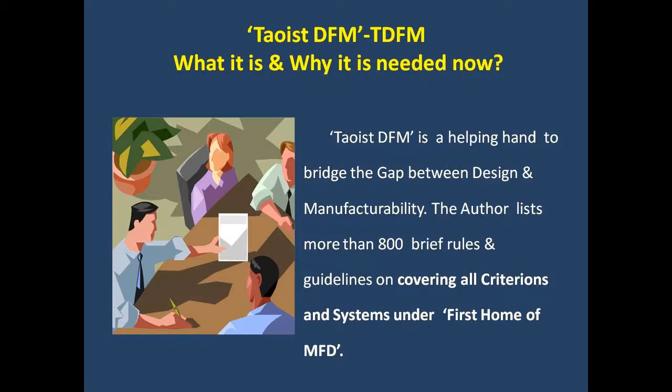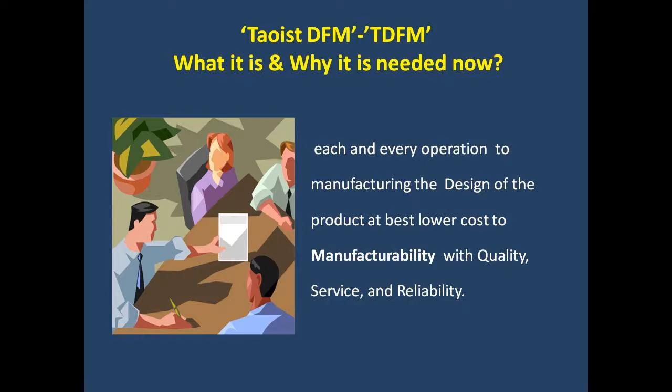Each and every operation to manufacturing design the product at best, lower cost to manufacturability with quality, service, and reliability. By following the rules and guidelines, CAD engineers can climb up the ladder to become an ideal practical designer.

80% of the cost is determined while releasing the drawing from PD. By the time the product goes to production, 95% of its cost is determined. So it will be very difficult to remove cost at a later stage.

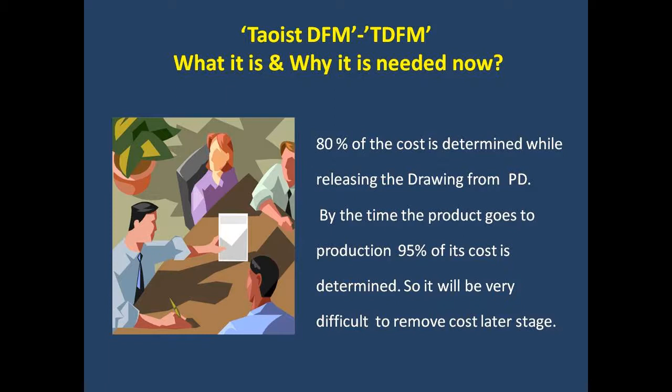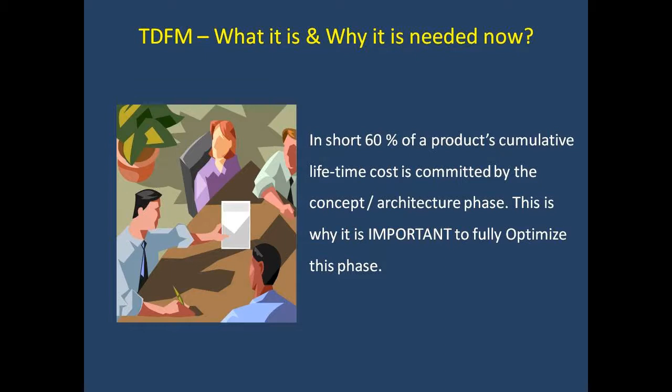In short, 60% of a product's cumulative lifetime cost is committed by the concept architecture phase. This is why it is important to fully optimize this phase. And in practice, most of our engineering products or equipment are only re-engineering or reverse engineering of approved products. Only a small percentage are 100% new and original thoughts.

More on the book of Taoist Design for Manufacturability: 8 criterions and 8 systems built on the basic foundations provided by Dr. Anderson on DFM, our mentor.

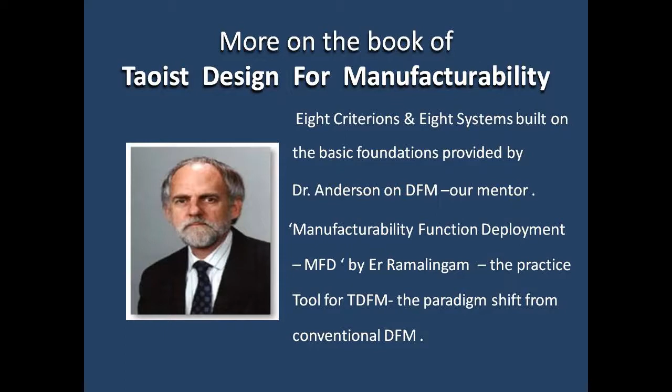Manufacturability Function Deployment, MFD, by Er Ramalingam, the practice tool for Taoist DFM, the paradigm shift from conventional DFM. Concurrent engineering team with participation of domain experts from Yang and Yin.

Developing the perfect operation process sheet cum quality plan by merging process division with design division. QMS head as the group captain under Tao of DFM, with additional captains from design and manufacturing. World's most simplified DFM methodology, developed with MS Excel.

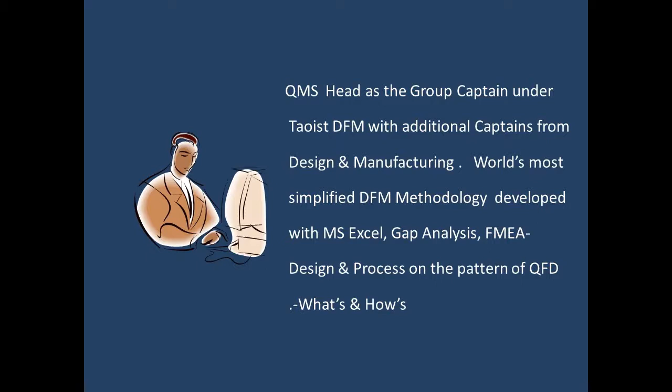Gap analysis, FMEA, design and process on the pattern of quality function deployment, whats and hows. Welcome manufacturing engineers with passion for design and design engineers with passion for manufacturing, for skill development of experienced engineers, faculties from industries, institutions from any domain who can blend both bricks and clicks.

Taoist Design for Manufacturability: origin of DFM. The conventional design approach was to include manual assembly so that manufacturing engineers could make justifications for automation proposals.

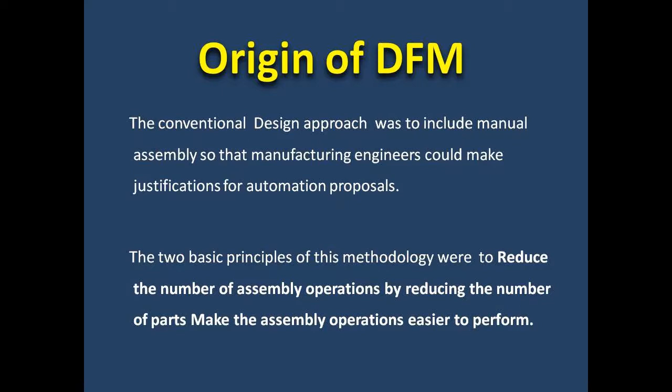The two basic principles of this methodology were to reduce the number of assembly operations by reducing the number of parts, and to make the assembly operations easier to perform. These principles stood in stark contrast to the dominant producibility guidelines of the time.

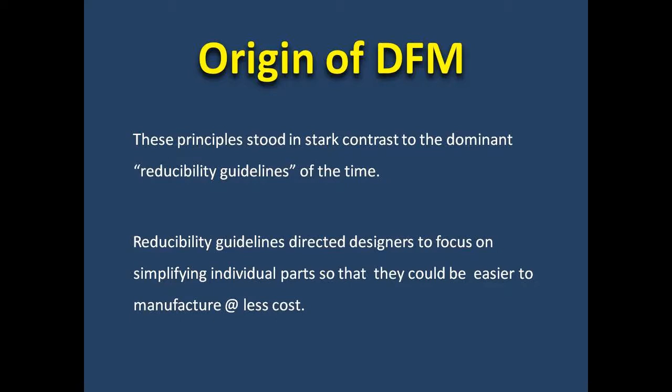Reducibility guidelines directed designers to focus on simplifying individual parts so that they could be easier to manufacture at less cost. Dr. Boothroyd's groundbreaking research exposed the fact that this practice actually led to substantially higher product costs relative to the use of fewer, multifunctional parts.

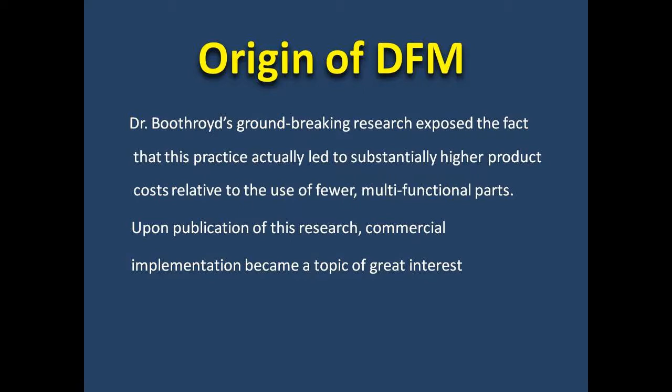Upon publication of this research, commercial implementation became a topic of great interest. In 1980, Dr. Peter Dewhurst joined with Dr. Boothroyd to create the software package Design for Automatic and Manual Assembly, DFA, for the Apple II Plus.

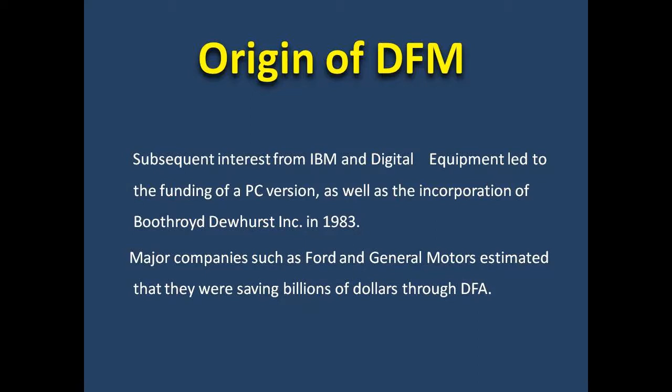Subsequent interest from IBM and Digital Equipment led to the funding of a PC version, as well as the incorporation of Boothroyd Dewhurst Inc. in 1983. Major companies such as Ford and General Motors estimated that they were saving billions of dollars through DFA.

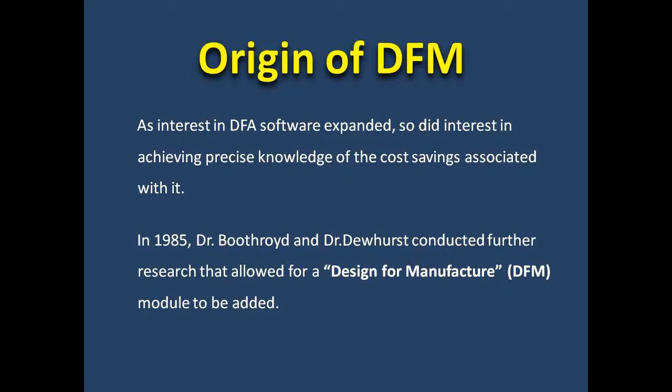As interest in DFA software expanded, so did interest in achieving precise knowledge of the cost savings associated with it. In 1985, Dr. Boothroyd and Dr. Dewhurst conducted further research that allowed for a Design for Manufacture, DFM, module to be added.

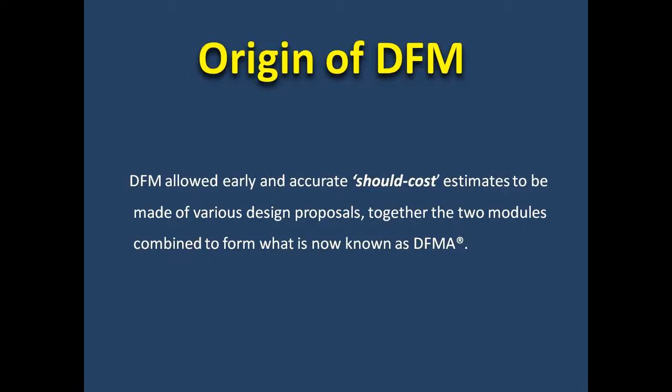DFM allowed early and accurate should-cost estimates to be made of various design proposals. Together, the two modules combined to form what is now known as DFMA.

The enormous benefits that DFMA provided to leading manufacturers led President George H.W. Bush to award the founders of BDI the National Medal of Technology in 1991.

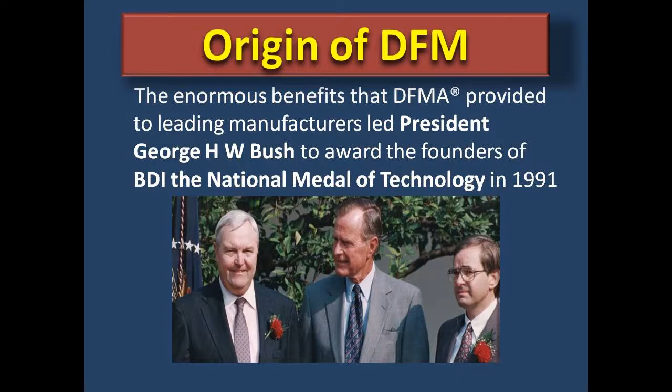They have proved that better designed products need no automation to increase productivity. Design for Manufacturability and Concurrent Engineering, by Dr. David M. Anderson, 2004.

After a short-term training on Dr. Anderson, being an electrical engineer cum professor, was able to implement DFM with his earlier employer Intel to bring fantastic productivity in-house with his own tool room supports.

Then Dr. Anderson started sharing outside also, and shared with the world through his master book titled Design for Manufacturability and Concurrent Engineering, during 2004.

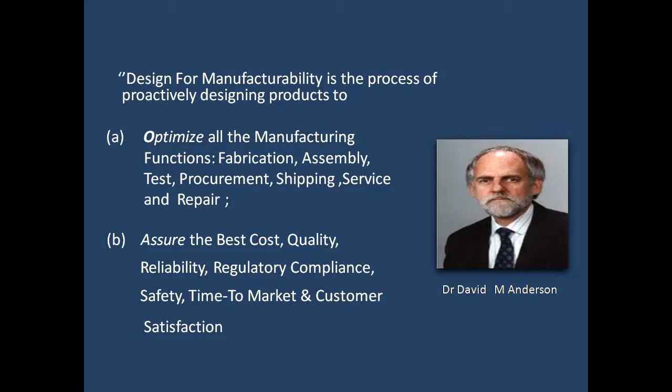Design for manufacturability is the process of proactively designing products to, A, optimize all the manufacturing functions: fabrication, assembly, test, procurement, shipping, service and repair; and B, assure the best cost, quality, reliability, regulatory compliance, safety, time to market, and customer satisfaction.

Ensure that lack of manufacturability doesn't compromise functionality, styling, new product introductions, product delivery, improvement programs, strategic initiatives and unexpected surge in product demand, as per Dr. David M. Anderson, our mentor for DFM.

Concurrent engineering is the process of designing products in multifunctional teams with all specialities working together from all the stages.

Dr. Anderson has certified this author as India's DFM expert during 2011. He sent a copy of his 2011 edition duly signed by him for my study on his DFM, a rare honor of introduction for this author in India.

Through this popular DFM book and direct interactions with the undersigned in an attempt to bring about a DFM movement during 2011, this author came out with his maiden book titled Taoist Directions for Design and Development, synergizing his own thoughts on Taoism with DFM during 2014.

Taoism is presented by Dr. Fritjof Capra in his book The Tao of Physics, 1975. This author has been fascinated by the out-of-box thinking of finding parallels between modern physics and Eastern mysticism of Taoism, as displayed in the widely sold book by Dr. Fritjof Capra titled The Tao of Physics.

Like Dr. Fritjof Capra, author Mr. K.S. Ramalingam, in an out-of-box thinking, found parallels between design for manufacturability and Eastern mysticism of Taoism, as displayed through Yang and Yin.

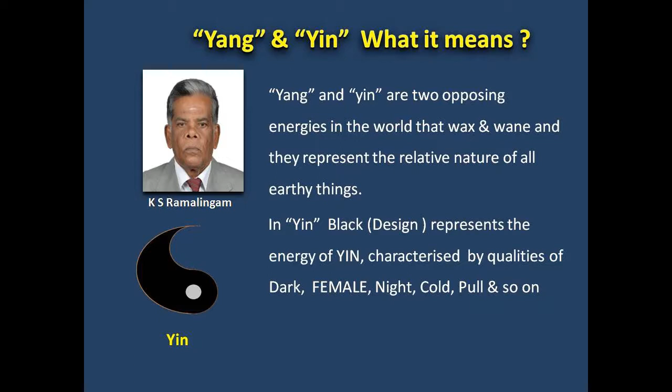In Yin, black design represents the energy of Yin, characterized by qualities of dark, female, night, cold, pull and so on. In Yang, white design represents the energy of Yang, characterized by qualities of white, male, day, hot, push and so on.

Within the Yin, lies the seed of Yang, as represented by the white dot. Within the Yang, lies the seed of Yin, as represented by the black dot.

Within the Yin manufacturability, lies the seed of Yang design, as represented by the white dot. Within the Yang design, lies the seed of Yin manufacturability, as represented by the black dot.

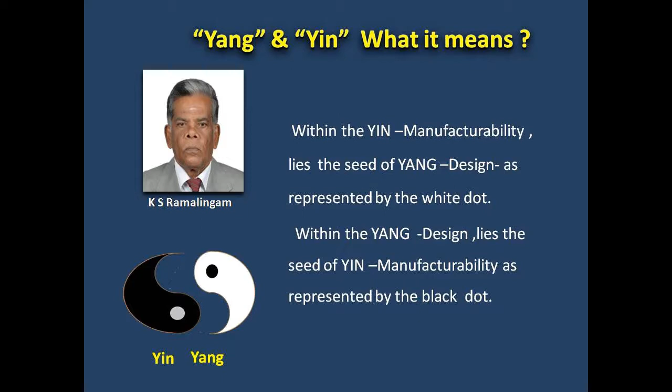At the interface between Yin and Yang, manufacturability and design, lies the creative potential of getting products with reliable design and rapidly developed with responsive DFM.

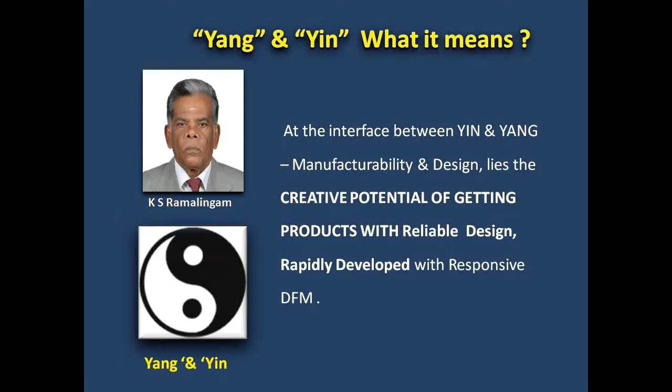Taoism and Dr. Fritjof Capra: The Taoists saw all changes in nature as manifestations of the dynamic interplay between polar opposites Yin and Yang, and thus they came to believe that any pair of opposites constitutes a polar relationship where each of the two poles is dynamically linked to each other.

This author, Mr. K.S. Ramalingam, saw all changes in engineering products as manifestations of the dynamic interplay between polar opposites design and manufacturability, and came to believe that any pair of opposites constitutes a polar relationship where each of the two poles is dynamically linked to each other.

You can find in the author's first DFM handbook the comments offered by Dr. Anderson as follows: more than thousands of rules, guidelines. That should be good for your book and your practice.

These rules and guidelines form the core of MFD, manufacturability function deployment, by this author himself.

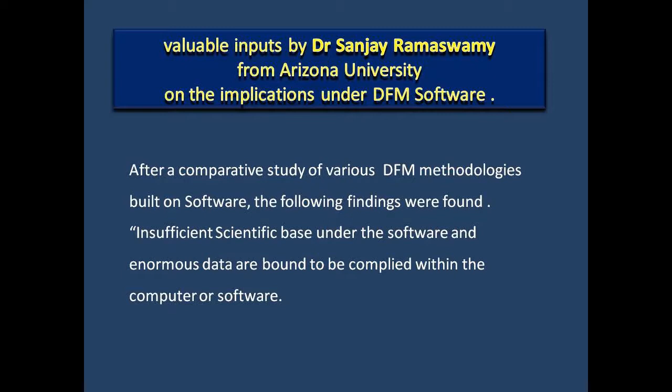Valuable inputs by Dr. Sanjay Ramaswamy from Arizona University on the implications under DFM software. After a comparative study of various DFM methodologies built on software, there is an insufficient scientific base under the software, and enormous data are bound to be compiled within the computer or software.

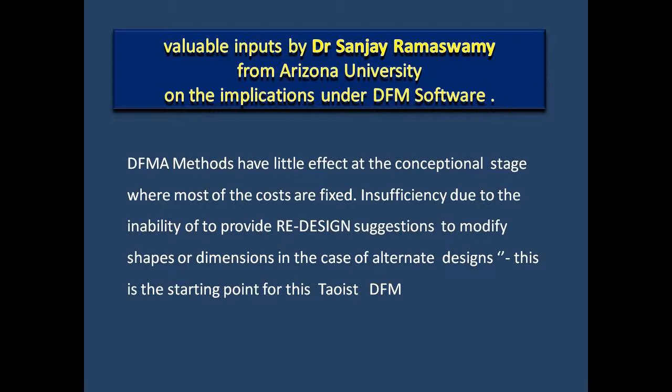DFMA methods have little effect at the conceptual stage, where most of the costs are fixed. There is an insufficiency due to the inability to provide redesign suggestions to modify shapes or dimensions in the case of alternate designs. This is the starting point for my Taoist DFM.

Definition of Taoist DFM (TDFM): 64 spokes join in one hub. Taoist DFM's outcome is manufacturable products, or manufacturability, the Yin. The hardware is all visible to the naked eyes.

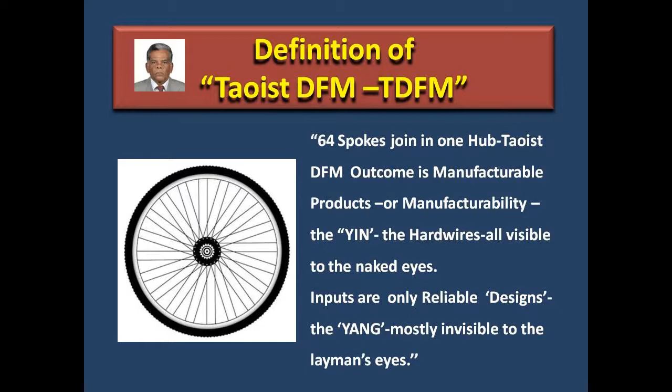Inputs are only reliable designs, the Yang, mostly invisible to the layman's eyes. It is the invisible, or design, DFM, which creates the function of the manufactured products which are visible. All designs are invisible; only everything is now open to the world through Taoist DFM, TDFM.

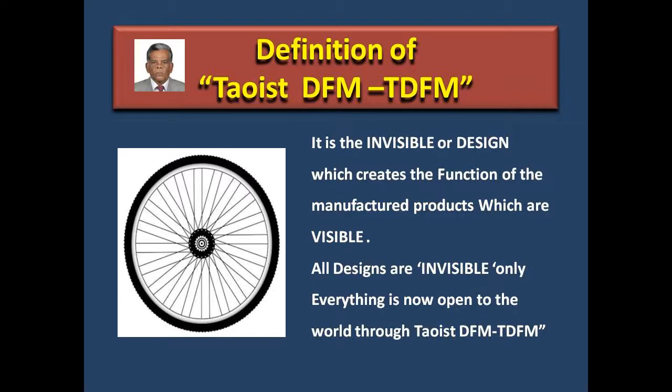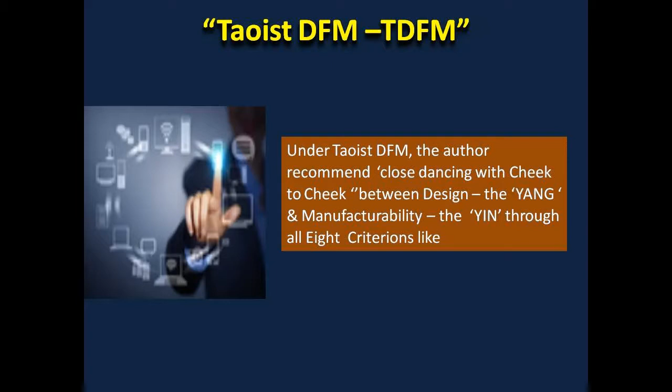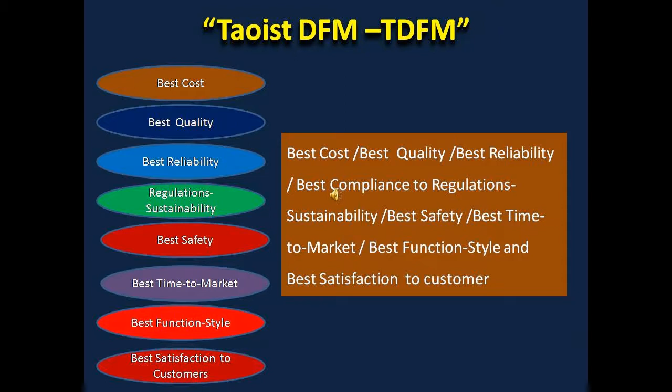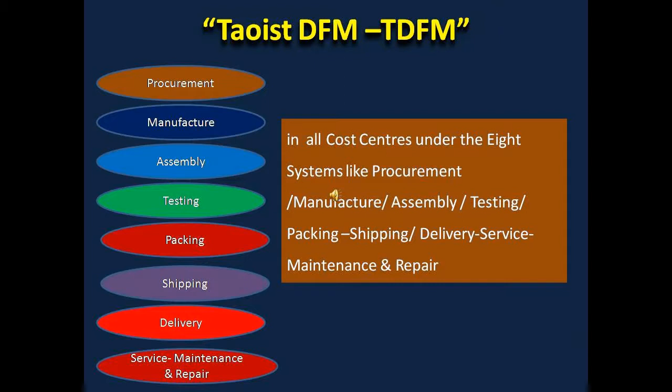Under Taoist DFM, the author recommends close dancing, cheek to cheek, between design, the Yang, and manufacturability, the Yin, through all 8 criterions like best cost, best quality, best reliability, best compliance to regulation and sustainability, best safety, best time to market, best function and style, and best satisfaction to customers, across all cost centers under the 8 systems like procurement, manufacture, assembly, testing, packing, shipping, delivery, service, maintenance and repair.

Differences between conventional DFM and Taoist DFM.

Under Taoist DFM, design for manufacturability is moved from a design function to a regulatory function to overcome some of the constraints of conventional DFM, facilitating improvements in DFM analytics. It overcomes the resistance of the design team itself by awarding a different role, taking up the role of a champion, not as fully responsible for design without affecting the ego of the design team.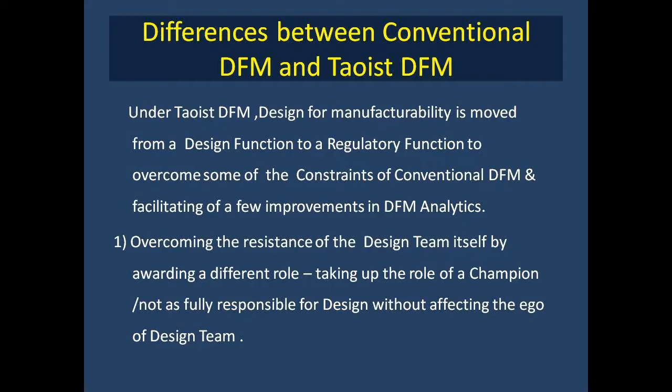The merger of process team with design team removed the gap between design and process. The reinforced design team is given total responsibility for design and process, and the process is in full alignment with design or vice versa, a 50% score in manufacturability indeed.

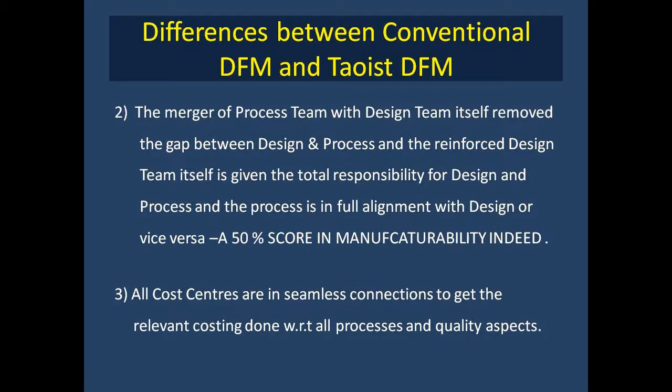All cost centers are in seamless connection to get the relevant costing done with reference to all processes and quality aspects. Since the group captain from QMS quality is assigned the leadership role, management is assured of total support from QMS, design, and manufacturing for all business processes.

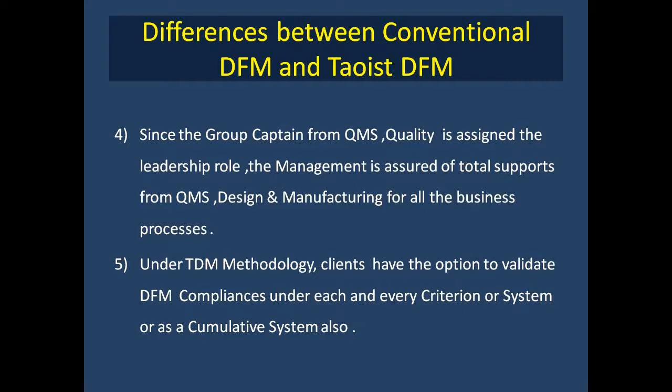Under TDM methodology, clients have the option to validate DFM compliances under each and every criterion or system, or as a cumulative system also. Clients have the liberty to do redesign at any stage, or part, or sub-assembly also.

As the MR is the group captain under TDFM, the whole team is committed and it becomes a joint responsibility of captains from quality, manufacturing, and design, as they are also jointly committed.

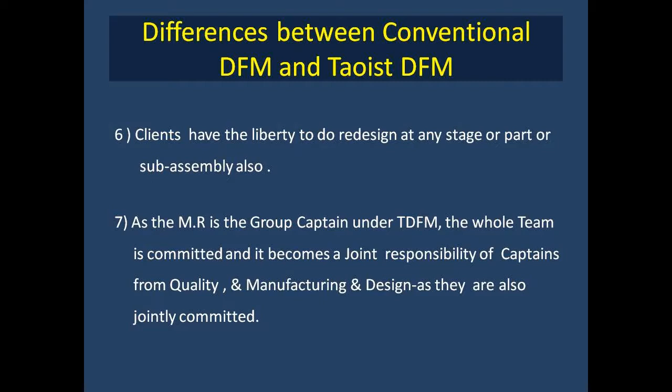Under engineering products and equipment, most of the new products are either in re-engineered design or a reverse engineered design out of the older approved one.

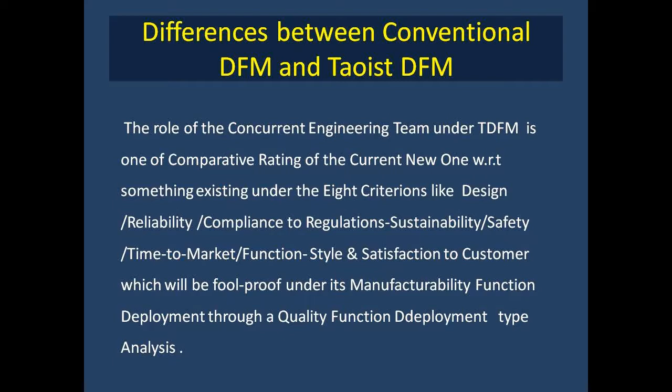The role of the concurrent engineering team under TDFM is one of comparative rating of the current new one with respect to something existing, under the 8 criteria like design, reliability, compliance to regulations, sustainability, safety, time to market, function, style, and satisfaction to customer, which will be foolproof under its manufacturability function deployment through a quality function deployment, QFD type analysis.

The Yang and Yin of Taoist DFM. A separate presentation is available on CET with Yang and Yin, prologue to Taoist DFM.

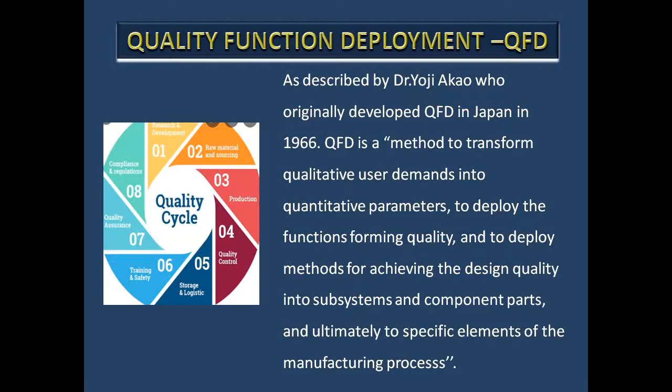Quality Function Deployment, QFD, as described by Dr. Yoji Akao, who originally developed QFD in Japan in 1966. QFD is a method to transform qualitative user demands into quantitative parameters, to deploy the functions forming quality, and to deploy methods for achieving design quality into subsystems and component parts, and ultimately to specific elements of the manufacturing process. The author combined his work in quality assurance and quality control points with function deployment used in value engineering.

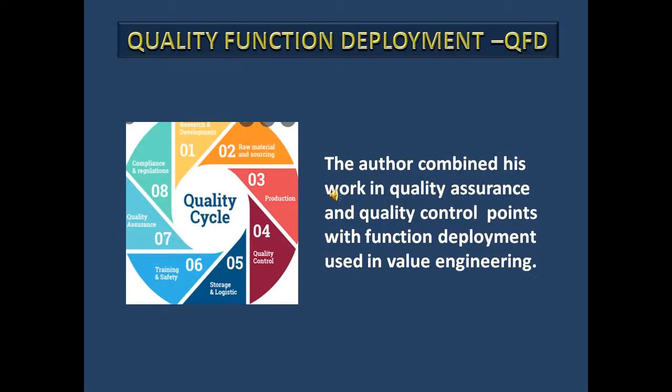Manufacturability function deployment is a method to transform DFM recommendations of the concurrent engineering team, with a blend of yang and yin, into quantitative parameters, to deploy the manufacturability functions into design of subsystems and component parts, and ultimately to specific elements of the process of manufacturing, as per Tao of DFM.

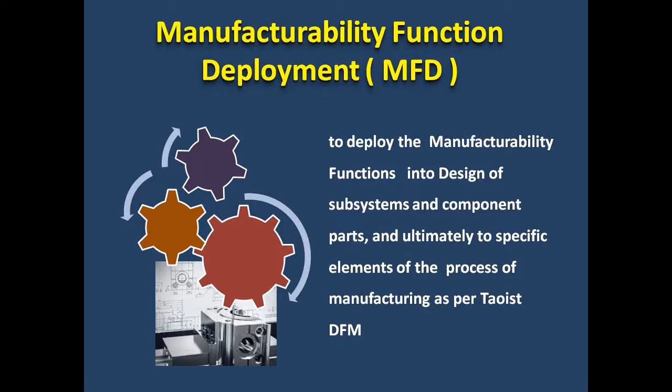Developing the perfect operation process sheet cum quality plan. Merging process planning division with the design division is mandatory under Tao of DFM. It ensures avoiding bugs in design through synchronization.

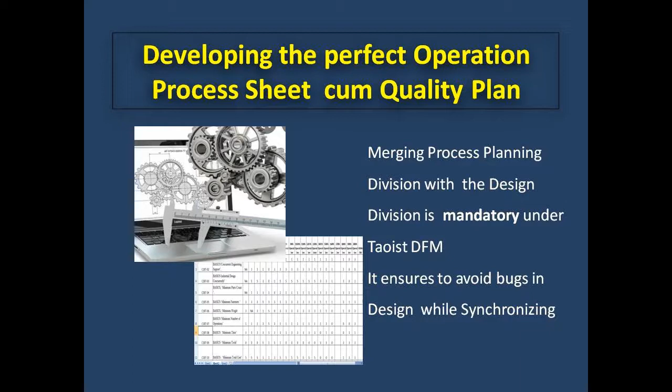While evolving the process cum quality plan, the process engineering team has to adopt various rules and guidelines as per TDFM for all the processes in each cost center, which is again cross-checked by the CET for all processes, either system-wise or criterion-wise.

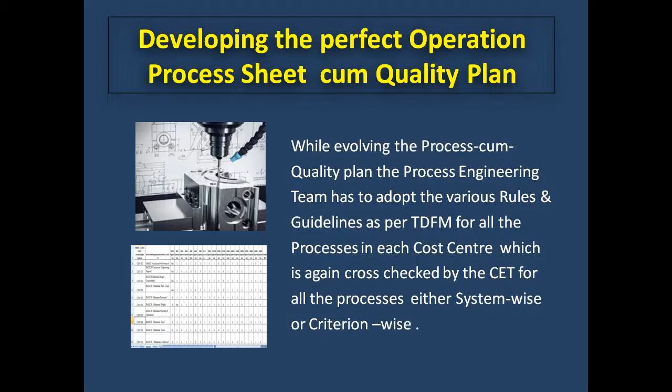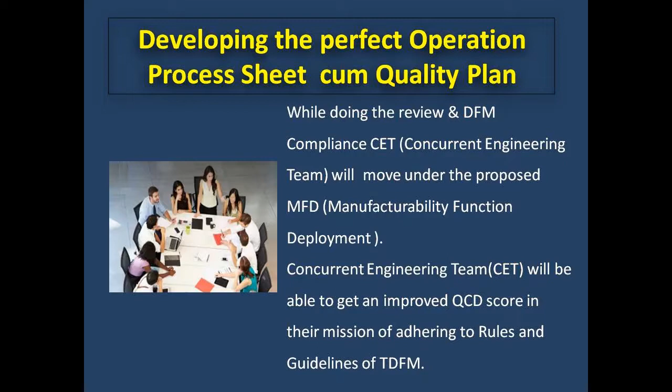While doing the review and DFM compliance, the concurrent engineering team, CET, will move under the proposed MFD, manufacturability function deployment. CET will be able to get an improved QCD score in their mission of adhering to rules and guidelines of TDFM. The ratings under rules will be from 0, 1, 3, or 5 depending upon the infrastructure, while the guidelines will be rated 0, 1, 3, 4, 5, or not applicable.

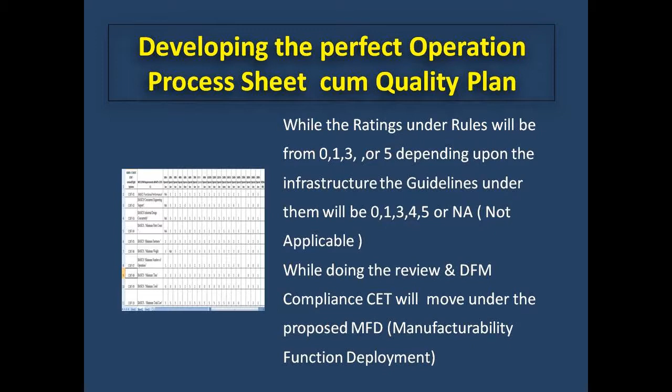While doing the review and DFM compliance, CET will move under the proposed MFD, manufacturability function deployment, developing the perfect operation process sheet cum quality plan.

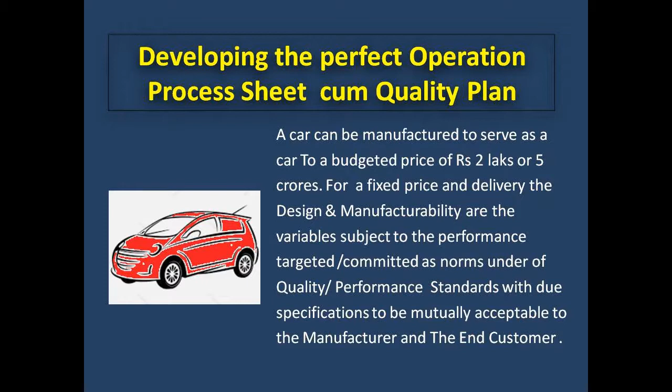A car can be manufactured to serve as a car at a budgeted price of 2 lakhs or 5 crore rupees. For a fixed price and delivery, the design and manufacturability are the variables, subject to the performance targeted and committed as norms under quality performance standards, with due specifications mutually acceptable to the manufacturer and the end customer. QMS head is the group captain under Tao of DFM, with additional captains from design and manufacturing.

While any unit can have their own process of design, developed in-house or adopted from elsewhere, MFD can be the guide to check for compatibility to TDFM, as stipulated in 8x8 equals 64 modules.

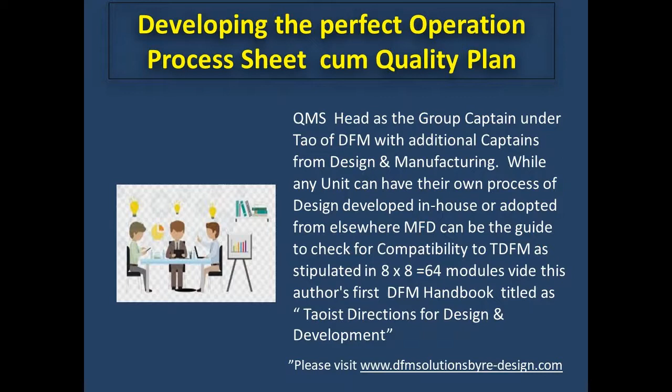Vide this author's first DFM handbook, titled Taoist Directions for Design and Development. Please visit Tao of DFM, Taoist Direction for Design and Development, world's most simplified DFM methodology.

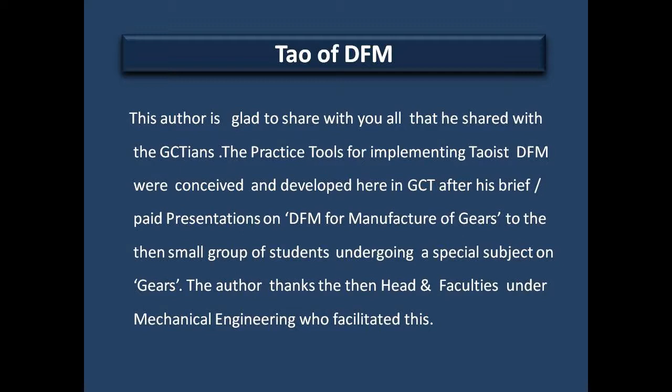Taoist design for manufacturability. It was really inspiring for this author to deliver his third external presentation on TDFM here in GCT workshop, where he was doubly thrilled to see their old cupola physically erected. The project during 1968 had been erection of cupola as per the directions of great Principal Professor P. R. Ramaswamy to the then VRGCT group during 1965-68.

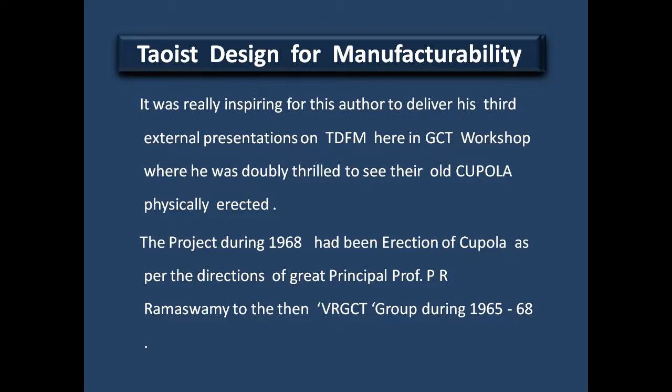The author has developed the world's simplest methodology for implementing his Taoist DFM under manufacturability function deployment (MFD). It is by taking every operation cost center under the process of manufacturing or actual general business operation as the basic element for a DFM analysis.

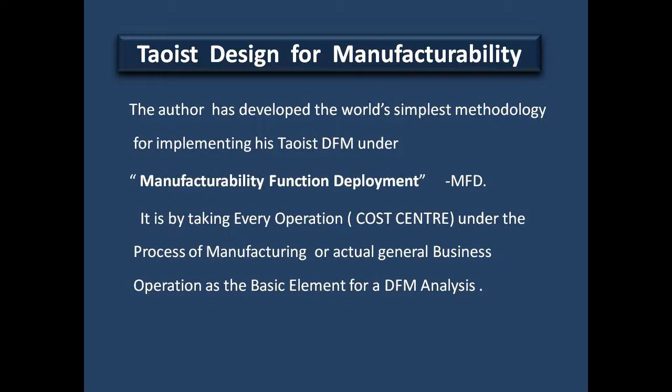To apply the scientifically bifurcated 8 criteria for each and every system under manufacturability and applying various rules and guidelines as per TDFM, you can find that the first 10 commandments under TDFM only come under the rules under Part A of first level of TDFM, and the next part are the 12 enhancements ideally listed under Part B of first level of TDFM. Evaluations are done for the 8 criteria as well as 8 systems for each and every operation in sequence. Nothing is left out while analysing for TDFM compatibility test.

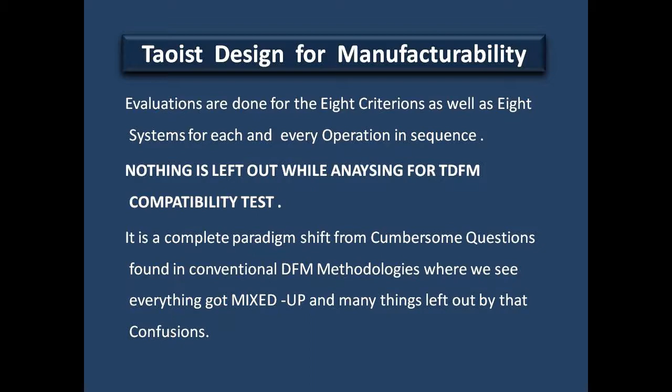It is a complete paradigm shift from cumbersome questions found in conventional DFM methodologies where we see everything got mixed up and many things left out by that confusion. It is not like DFM software where everything is concealed and nothing is transparent to enable corrections. He made the attempt to come out with the golden blend and introduce some speed also by going for MS Excel as of date. Continuous upgradation is the basic policy to provide better Q at lower C with faster delivery.

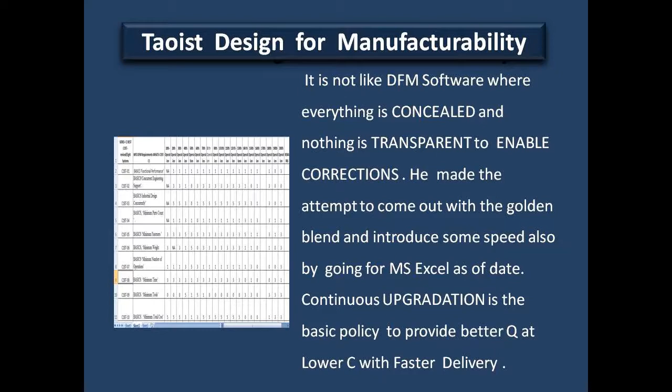Just to remind all design professionals that Taoist DFM is there to take care of the non-functional aspects of the design which are not covered by basic design skills, CAD and other supporting systems for product design, which play major roles, more than 60%, when we enter into actual manufacture and do business with that. Analytical chart.

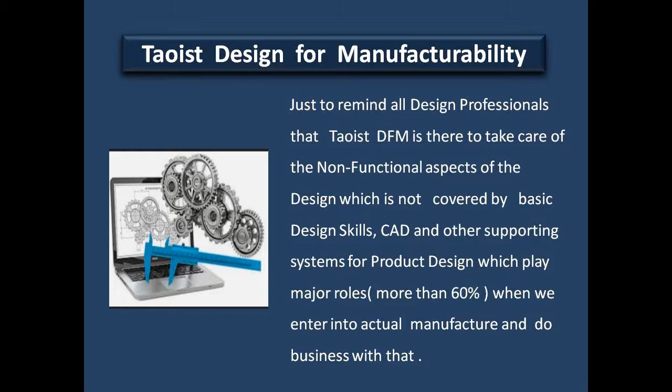The author has listed more than 800 rules and guidelines under the revised list for use by clients covering all criteria and systems under this first house of MFD. The balance of empty cells numbering about 1200 can be used when going for third level of TDFM. The HOWS under this MFD are the operations for processes being planned under the manufacturing processes, making the deployment of manufacturability duly embedded seamlessly under MFD through a systematic deployment of gap analysis.

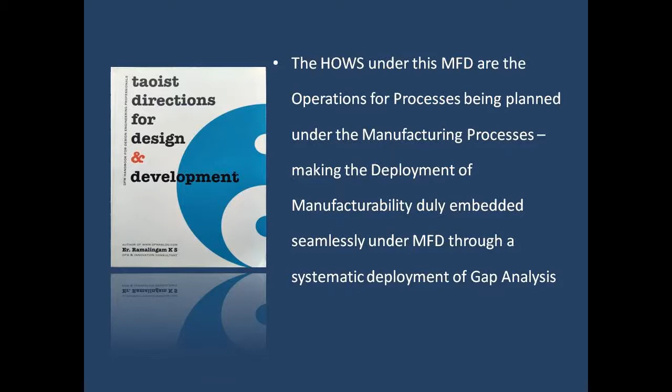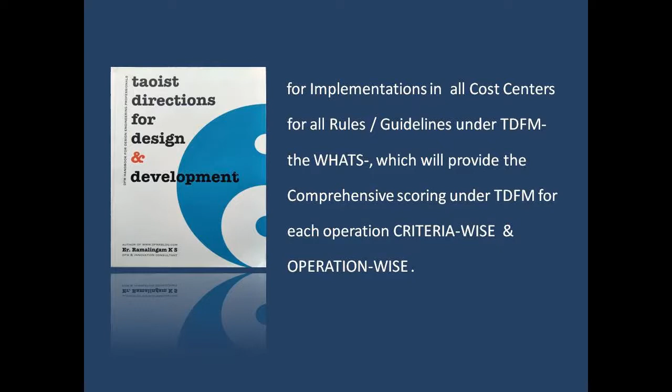For implementations in all cost centers for all rules and guidelines under TDFM, the WHATS will provide the comprehensive scoring under TDFM for each operation criteria-wise and operation-wise. Please note that this author has provided for 20 operations or houses as a standard. For designs requiring more than 20 operations, users can add more groups of 20 operations for practice.

The next from the author is Taoist Directions for Design and Development. Ideal synergizing between Yang and Yin. Yin is the heroine called manufacturability under our Tao of DFM. Yang is the hero called design under our TDFM. TDFM calls for closer synergy, a dance between yin and yang, not merely arm to arm but cheek to cheek, for delivering reliable designs with rapid developments through responsive TDFM.

The author has formed a concurrent engineering team comprising experts from various domains to take up TDFM projects as well as assignments at sites or from headquarters in Besant Nagar, Chennai 90, India.